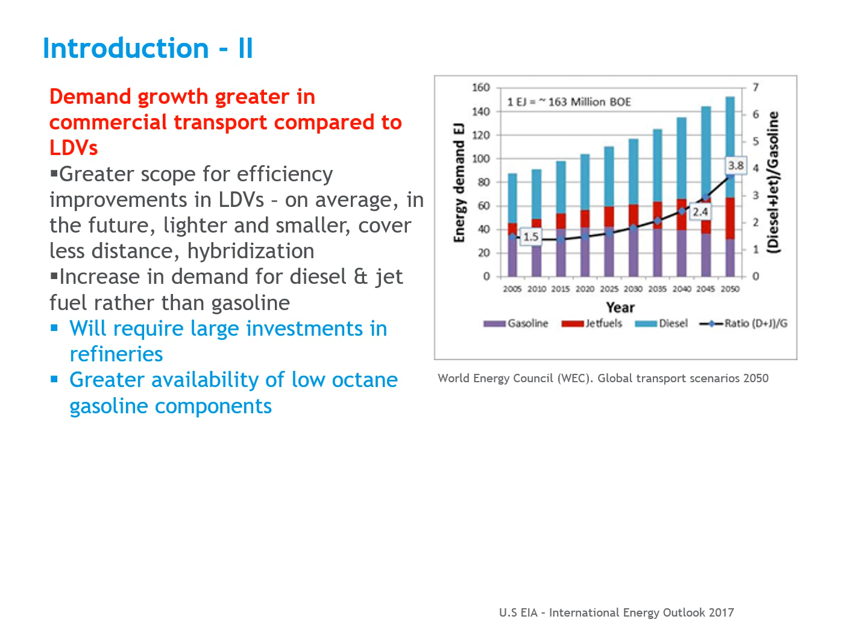So the oil refineries will have to process more oil in order to produce more diesel and jet, but they will be left over with material used for gasoline manufacture, which is basically low octane gasoline components. So there is likely to be much greater availability of low octane gasoline components in the future. And we'll come to that.

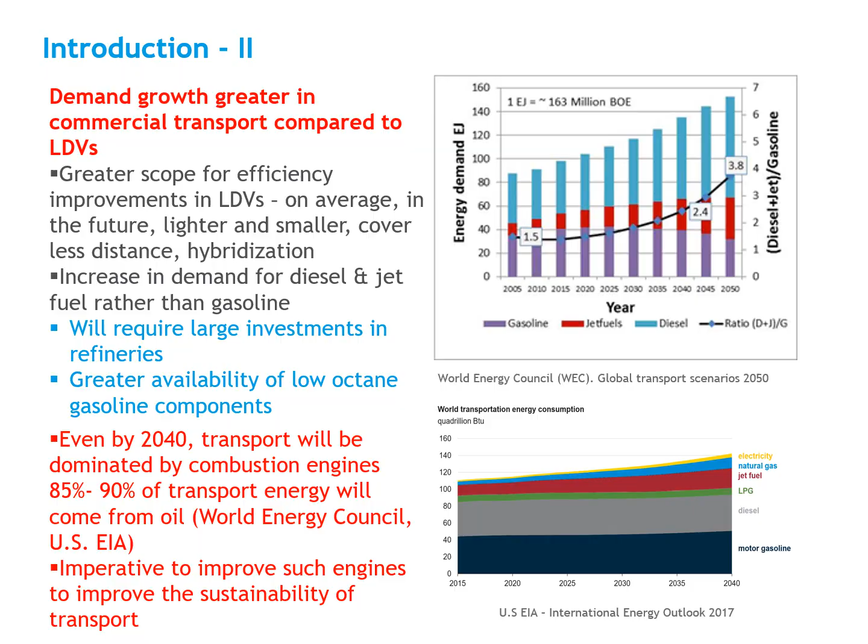This is fairly important. Anyway, I'll restate another important point that if you look at most credible projections, even by 2040, transport will be dominated by combustion engines. 85 to 90% of transport energy will still come from oil running these internal combustion engines. So it's absolutely essential to improve such engines to improve the sustainability of transport. Now let's look in a bit more detail at the electrification of transport, which is such a hot topic.

As you know, there are different degrees of electrification. Only the battery electric vehicles, BEVs, do not have an internal combustion engine, and all their energy comes from the electricity grid. And therefore they need a fairly large battery to allow sufficient range on the battery alone.

Then there are the hybrid electric vehicles, HEVs, such as the Toyota Prius, which have a much smaller battery. However, all their power comes from the internal combustion engine. But the battery and the motor and the electric transmission system allow these internal combustion engines to be much more efficient by managing the energy flow through the system. And also it allows the recovery of brake energy.

In between the two are the plug-in hybrid electric vehicles, which have batteries which are in between in terms of size of the two technologies, but they also have an internal combustion engine. So if the battery actually runs out of charge, the internal combustion engine will take over, and the range for PHEVs on which they can just run on electric power is quite small compared to the battery electric vehicle.

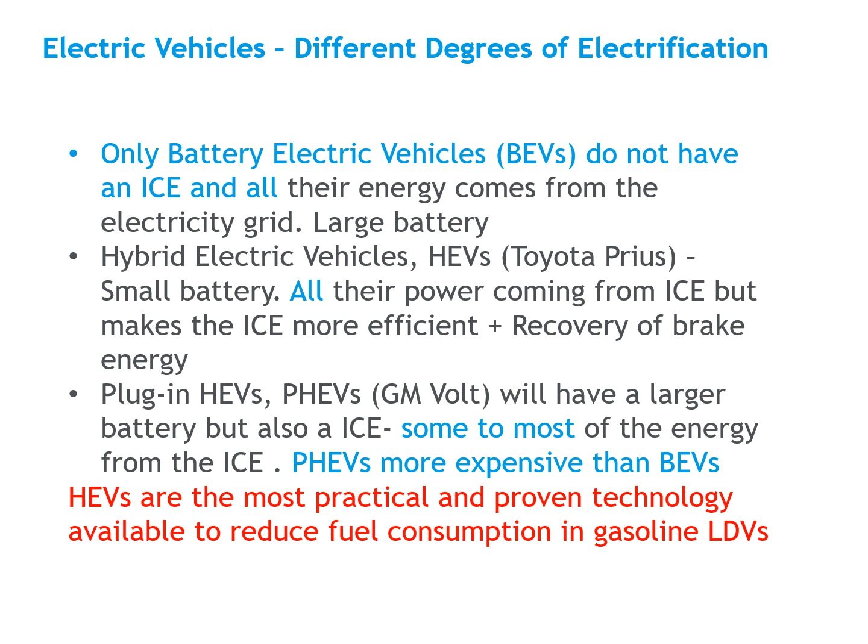Incidentally, we are focusing on battery electric vehicles because if you want to eliminate ICEs, basically you have to change all light-duty vehicles to battery electric vehicles. So by the end of 2019, the BEV stock was about 2.6 million in China, about 1% of passenger cars. And if you look at the whole globe, the global stock of BEVs was about 4.8 million in 2019. And they were mostly small cars, and that accounts for about 0.4% of the total number of light-duty vehicles.

In 2040, of course, global LDV numbers are expected to be between 1.7 and 1.9 billion. So if you want to replace current numbers of LDVs, you need to increase the number of BEVs by a factor of 300. And if you look forward to 2040, it has to be anything between 300 and 500 times more battery electric vehicles compared to now.

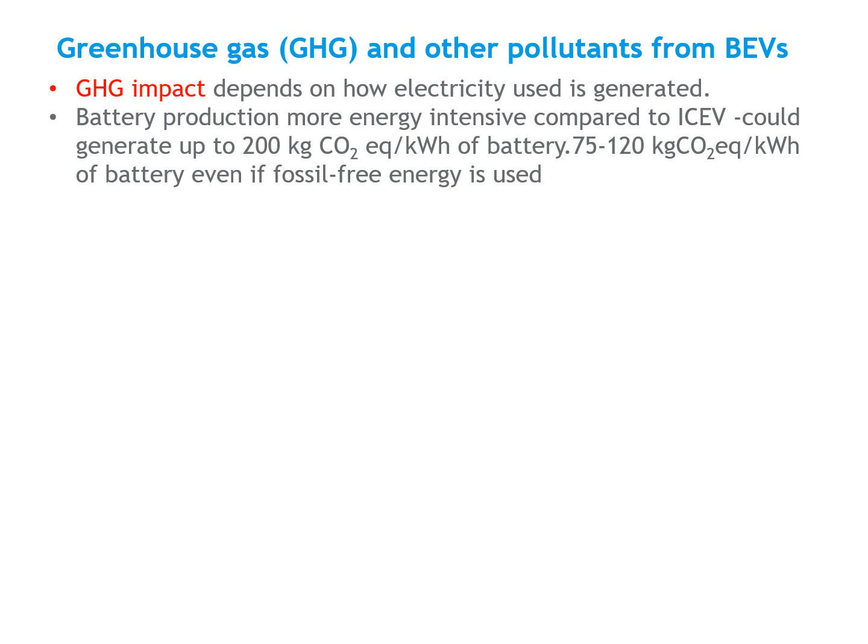In many parts of the world, certainly in India and China, coal is a very big factor in power generation. And in these countries, BEVs could cause more CO2 than equivalent internal combustion engines. Then there are other pollutants like sulfur dioxide, NOx, and particulates if coal is used for making electricity. Of course, this will not happen at the point of use of BEVs, but will be exported to where the power is generated. Nevertheless, it's an important source of pollution.

There are also very serious health problems associated with mining for materials for batteries, particularly for cobalt. And this is measured by the human toxicity potential, HTP. HTP is calculated to be about 3 to 5 times worse for BEVs than for ICEs, where the HTP comes about from exhaust pollution.

Also, mining for materials like lithium uses a lot of water, and there are water and water toxicity impacts associated with mining. Many of these problems are not actually discussed very much at the moment. They are swept under the carpet. This is because the number of BEVs is relatively small, and also it occurs in faraway places where the BEVs are not being used. However, if we are talking about an increase in BEV numbers by a factor of 300 to 500, these problems cannot be ignored. They will come to the fore. And the environmental movement will be very, very concerned about this.

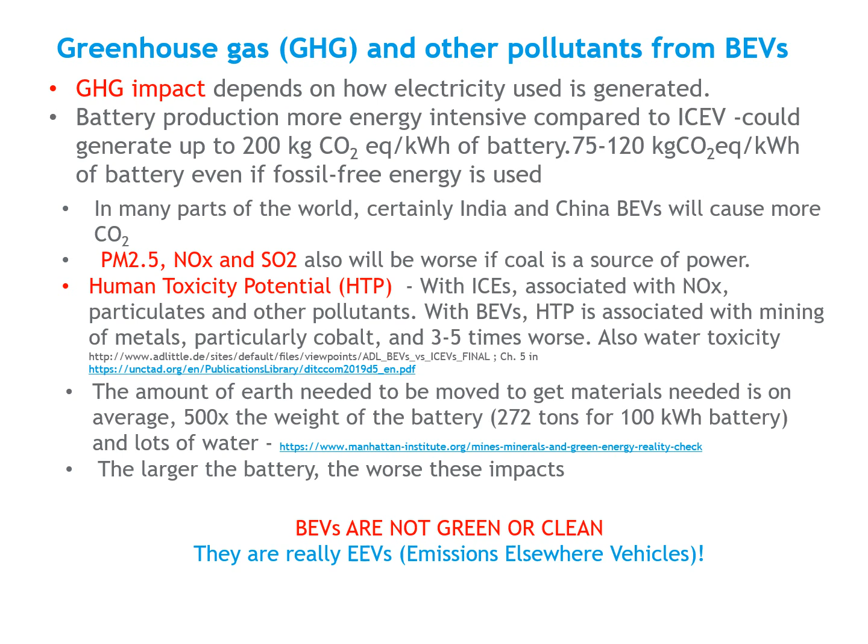Now, full electrification is not really relevant to most commercial transport that is outside the light-duty vehicle sector. For instance, a 40 US ton lorry with a range of 800 kilometers will require a battery of at least 1,000 kilowatt hour capacity, which will weigh at least 6 tons and will cost over 180,000 US dollars. And the charging time would be around 14 hours on a Tesla supercharger at 0.125 megawatts.

Now, if you look at the aircraft, there's a lot of fantasy about running air travel by batteries. But let's consider this A320, which is a medium size, medium range jet. It carries 266 megawatt hours of fuel energy. A battery pack carrying the same energy would weigh 1,640 tons, or 19 times the maximum takeoff weight of the aircraft. And at 1 megawatt charging, remember the Tesla supercharger is 0.125 megawatts, it would require 11 days to charge.

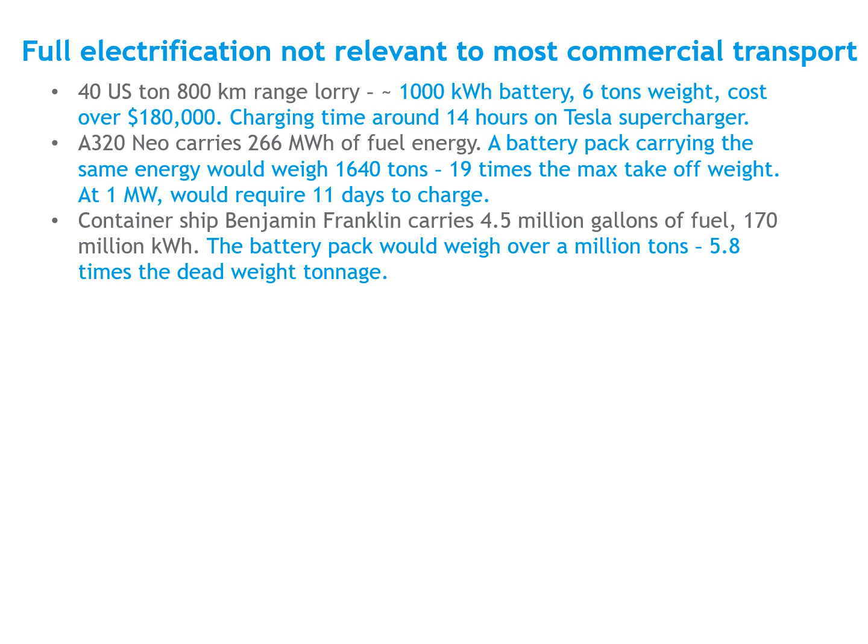This is also true about big ships carrying a lot of cargo across the oceans. For example, the container ship Benjamin Franklin carries 4.5 million gallons of fuel, or 170 million kilowatt hours of fuel energy. And the battery pack to carry this much energy would weigh 5.8 times the deadweight tonnage of the ship. So essentially battery electric vehicles are confined to the light duty vehicle sector.

There's quite a lot of talk that, of course, batteries will improve, and quite often Moore's law is cited. Moore's law is used to demonstrate how in the microprocessor industry, weight and cost have come down so dramatically. However, this is really not applicable to batteries. In fact, Václav Smil, who knows a lot about these things, calls it Moore's curse. In batteries, ions are the workhorses, and they occupy space, unlike in microprocessors or in your phone, where electrons do the work and they don't occupy space.

And that's why, in order to significantly improve batteries in terms of weight and so on, the battery chemistry will need to be completely different. Even then, we should not expect gains in performance and reduction in cost at greater than about 3% per year, generally, from now on, because this is what happens outside the microchip world, as Smil has pointed out.

And also, there is a myth that autonomous cars will accelerate the spread of BEVs. I don't think this is quite true, because level 5 autonomy requires extra power between 1.5 and 3.75 kilowatts because of additional computing and the sensors. In addition, you have to think about 1 to 5 kilowatts for heating and cooling. So we are talking of a minimum of 2.5 kilowatts, even if the car is sitting around like a New York taxi waiting for customers.

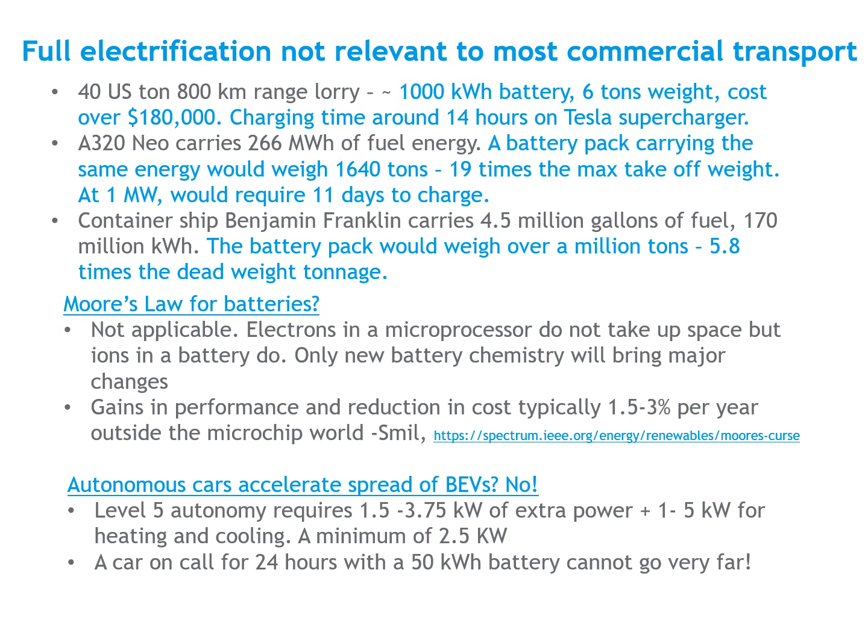There are economic and other implications of forced electrification of light-duty vehicles. Charging infrastructure, for instance. In the UK, 45% of the cars have to park on the streets, and they need public charging points to encourage people like that to buy battery electric vehicles. And I'm sure this is the case in China too. So in the UK, it's expected that such infrastructure will cost between 30 to 80 billion pounds.

There's also the lost government revenue from fuel tax, because many countries raise a lot of money by taxing the sale of fuels. In the UK, it's about 35 billion pounds a year, and this at some stage will have to be recouped if the sales of petrol, diesel and aviation fuel go down. Then there are the continuing incentives to persuade motorists to buy BEVs, because the upfront cost might not come down very much compared to ICE vehicles by 2030. There is a recent SAE paper which goes into this.

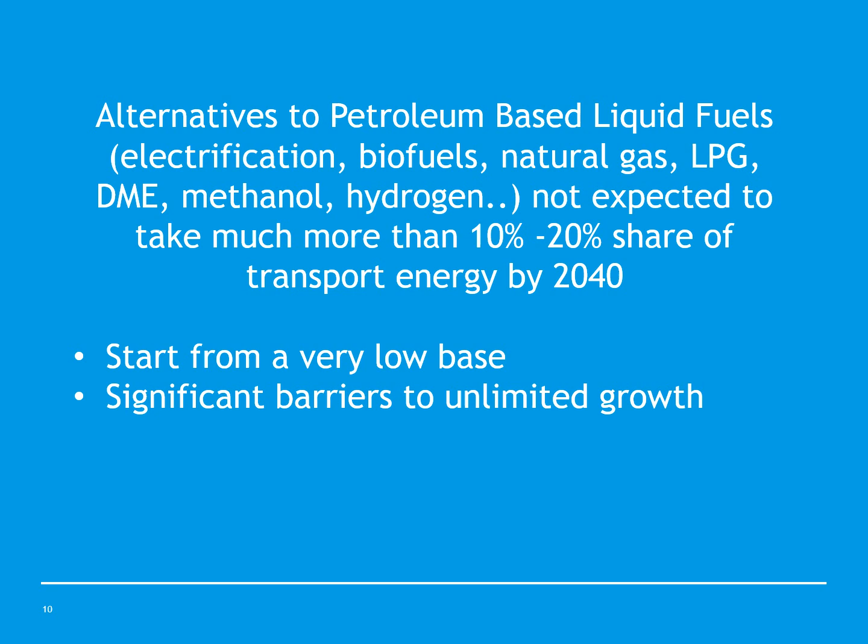But they're not expected to take much more than 10 to 20% of the share of transport energy by 2040, because they start from a low base and they have significant barriers to unlimited growth. Remember, right now they take about 5% share of the transport energy. So we are talking about doubling their share, but still they cannot replace gasoline and diesel and aviation fuel in the short to medium term.

So even in 2040, most credible projections show that 90% of transport energy will still come from petroleum-based fuels powering internal combustion engines. And the improvement of such systems is absolutely essential to ensure the sustainability of transport.

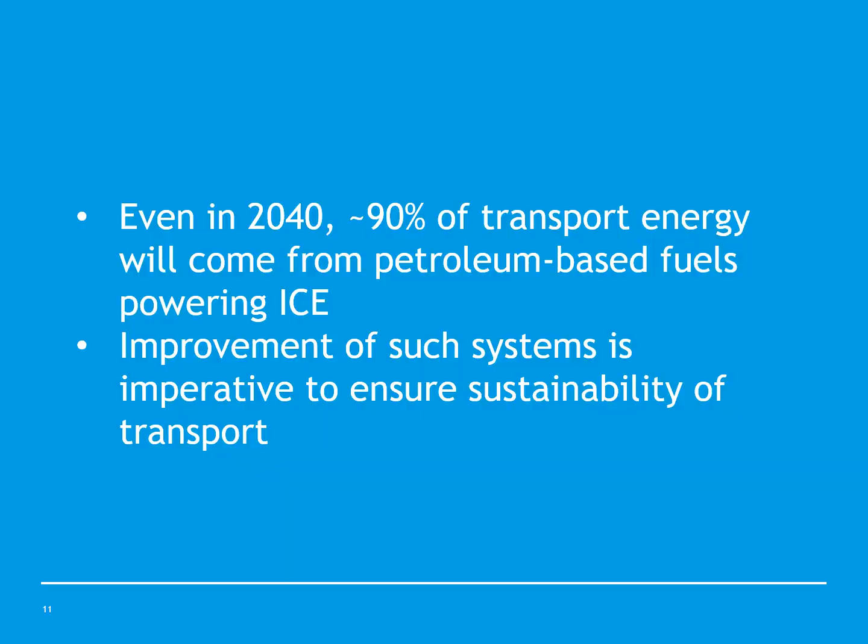So how do we go forward to ensure the sustainability of transport? And this is my view on this. I think there are three stages. In the first stage, conventional engines that we know using known fuels such as gasoline, diesel, compressed natural gas, liquefied petroleum gas, biofuel, and so on, improve and then reduce the greenhouse gas and other pollutants.

So how do we do this? Through better combustion, better control, better after-treatment systems, coupled with partial electrification, such as in hybrid electric vehicles. It might also require some changes in fuels. For example, gasoline anti-knock quality might need to be increased to enable higher efficiency spark ignition engines.

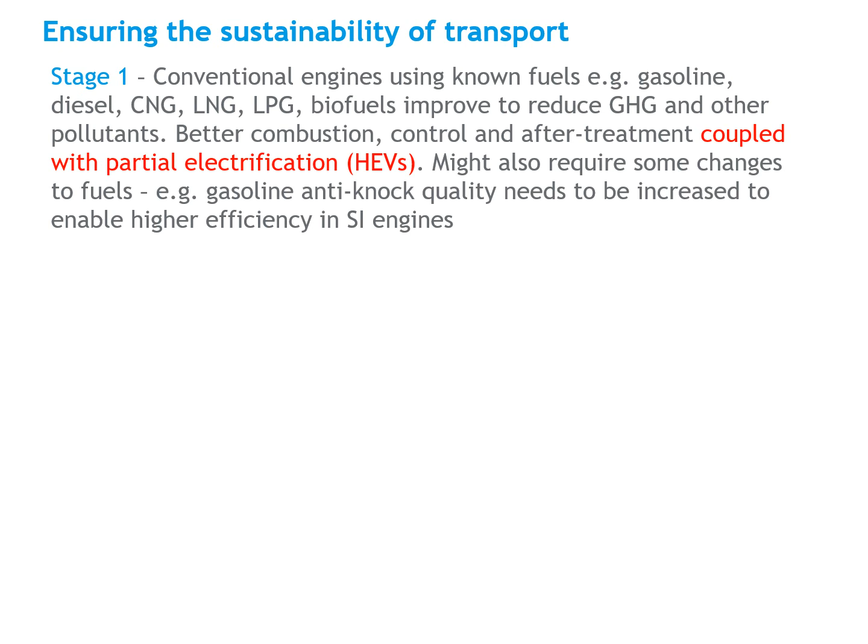In the second stage, we can think of developing new fuel engine systems to allow greater scope for improvement. We could also think of unconventional engines like opposed piston two-stroke engines, and using new fuels. New fuels meaning not really limited by existing specification, not like the fuels that we are selling in the market, but this will also offer further flexibility.

And such approaches will also help mitigate future supply demand issues. For example, as I said right at the outset, we can expect more availability of low octane gasoline. And if we can develop better engines using such fuels, there will be a lot of win-win solutions.

Then in the final stage, in the longer term, as the overall energy system decarbonizes and battery technology develops, there'll be an increasing role for battery electric vehicles and hydrogen and other things like this. But we must emphasize that changes like this need to be assessed on a cradle to grave or a life cycle analysis basis, though some changes may be forced.

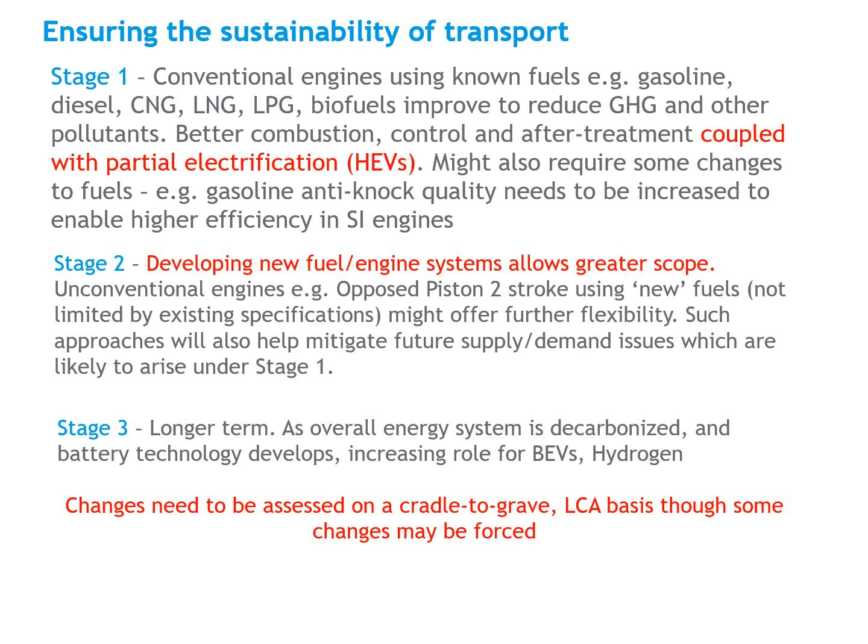What is the scope for improving internal combustion engines? There is a recent paper that we published, Leach et al., which you can look up, which addresses this issue. Actually, there's a significant scope for improving efficiency of the spark ignition engine through lean burn, downsizing and turbocharging, compression ignition, using better control, and so on.

For example, in the US already, the best-in-class efficiency is about 16% better than the average for cars of similar size and performance in the market. The gasoline direct injection compression ignition engine developed by Delphi shows a 25% improvement. Compared to 2015 fleet averages, a 30% improvement in the US market is easily possible with combustion system improvements alone.

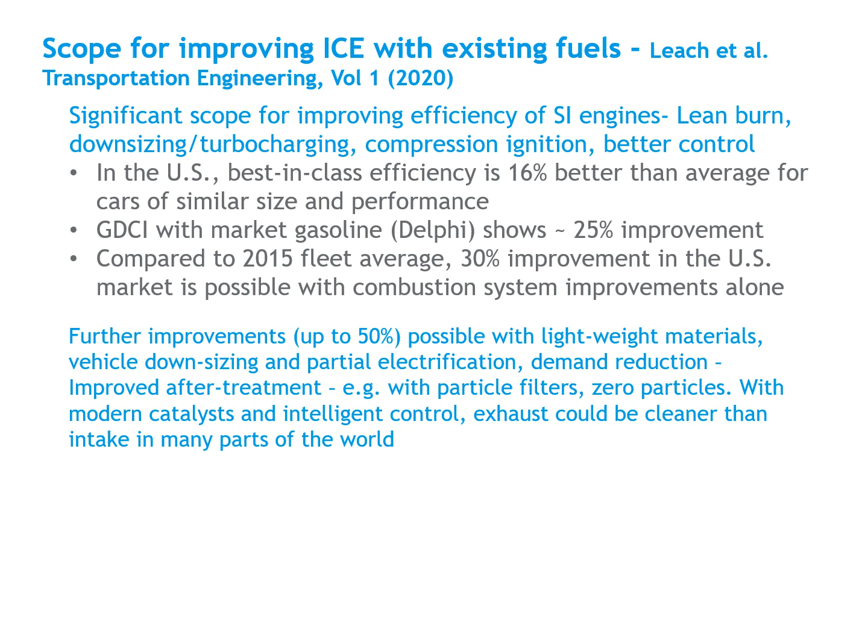This can be further improved and fuel consumption can be reduced by up to 50% by using lightweight materials, vehicle downsizing and partial electrification, demand reduction, and improved after-treatment systems. With particulate filters, you can get zero particles, and with modern catalysts and intelligent controls, you can actually get the exhaust to be much cleaner than the intake in many parts of the world. So there's a lot of scope for improving both the efficiency and the cleanliness of internal combustion engines.

There is also additional scope with so-called low carbon fuels. I won't go into this, but only if they make sense. That means they have to be assessed on a proper life cycle basis.

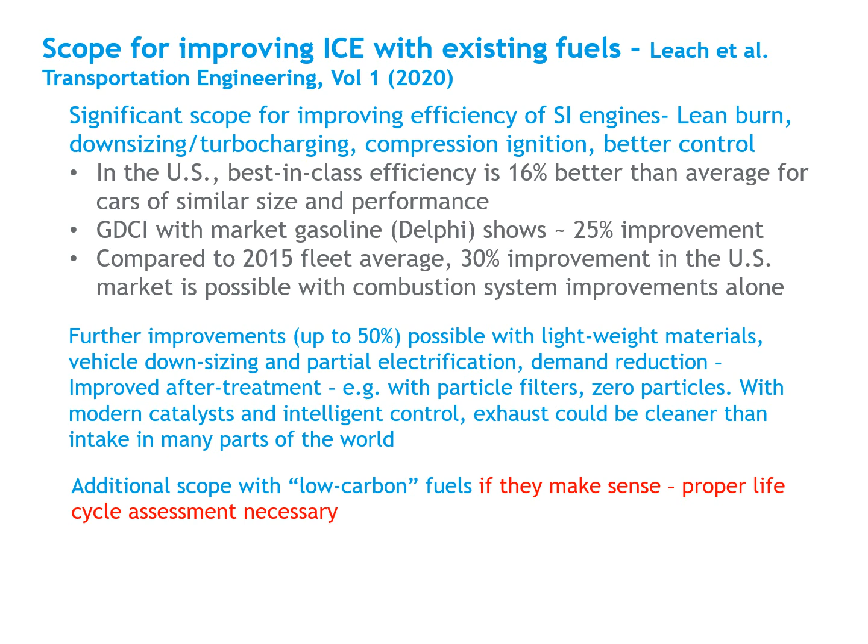Let me give some examples of fuel engine system development. Gasoline compression ignition, GCI, is something that's very close to my heart. It's essentially to run CI engines on low-octane gasoline rather than diesel fuel. The diesel combustion system is the most efficient internal combustion engine system. However, for historical reasons, it's been using diesel fuel, which ignites very quickly on injection into the cylinder before it has a chance to mix with oxygen in the cylinder sufficiently. And this leads to significant amounts of particulates and NOx.

However, if you inject gasoline type fuel into the diesel engine, the fuel has ignition delay and it won't ignite straight away, and it will have much more time to mix with oxygen in the cylinder, and you can very significantly reduce the formation of NOx and particulates. To cut a long story short, the overall greenhouse gas and efficiency benefits could be as high as 25 to 30% with respect to spark ignition and about 5% with respect to diesel engines.

The engine itself will be simpler and cheaper because you require low injection pressures. You don't rely on high injection pressures to promote mixing of fuel and air, oxygen in the cylinder. And the after treatment focus will be on hydrocarbons and CO control rather than NOx and soot. I won't go into all these details, but you can read up on this. And the fuel itself can be very low octane gasoline. It need not be the gasoline that you buy in the market.

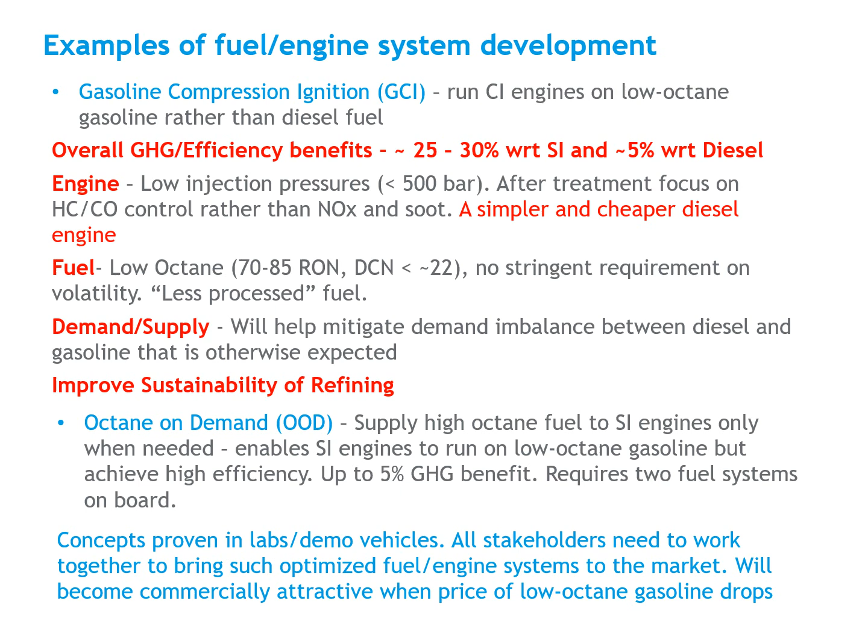These kinds of systems have been thoroughly proven in the laboratory and also been shown to be working in demonstration vehicles. However, to bring it to the market, all stakeholders need to work together. And it will, of course, become commercially very attractive when the price of low octane gasoline really drops compared to the conventional fuels. So let me sum.

In summary, the challenge is enormous. As I pointed out, even to replace just the light-duty vehicles in the world by BEVs will require the BEV numbers to increase by anything between 300 times and 500 times the current number. And this will produce enormous environmental, economic, and other challenges, and will be almost impossible to implement in many countries. Even then, it will only address 45% of the problem, because 55% of transport energy is still used by other forms of transport which are not light-duty vehicles.

And therefore, internal combustion engines will be there for many, many decades in very large numbers. And they need to be improved significantly. And therefore, there will be significant opportunities for R&D in this area in the future. In fact, all technologies, including battery electric vehicles, are needed to address the challenges posed by the transport sector. No single technology like BEV can address these problems.